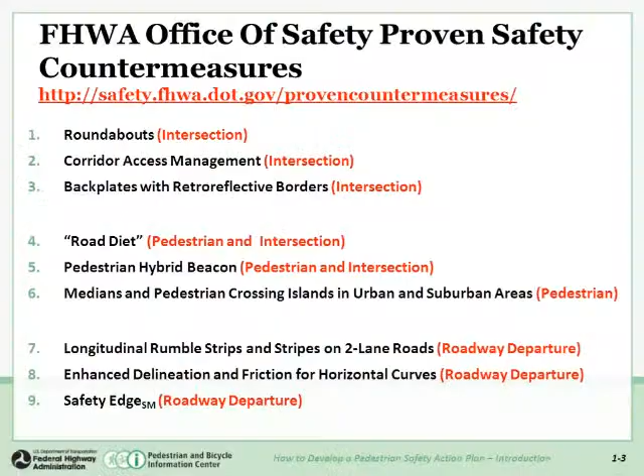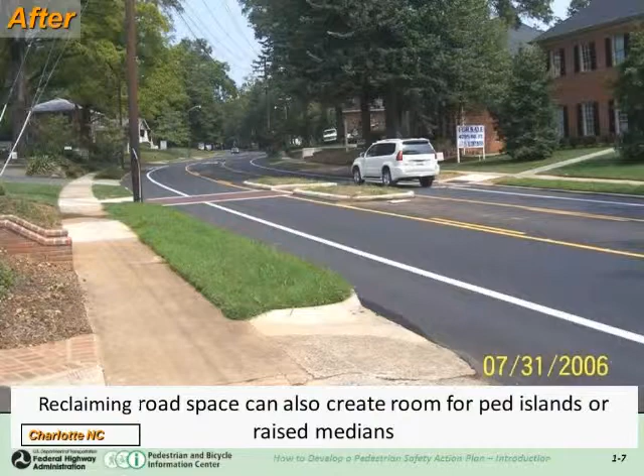Here's another type of road diet that could be implemented, which is instead of using just an ongoing two-way turn lane, you can reclaim the space for a median or median island for a refuge for pedestrians.

There have been a lot of before and after case study comparisons with raw crash frequencies, and some have measured speeds and other measures of effectiveness. There have been some operational modeling studies, primarily around the early 2000s. And recently we've seen some how-to guides and so forth come out. But the focus of my presentation is on the controlled safety evaluations of road diets.

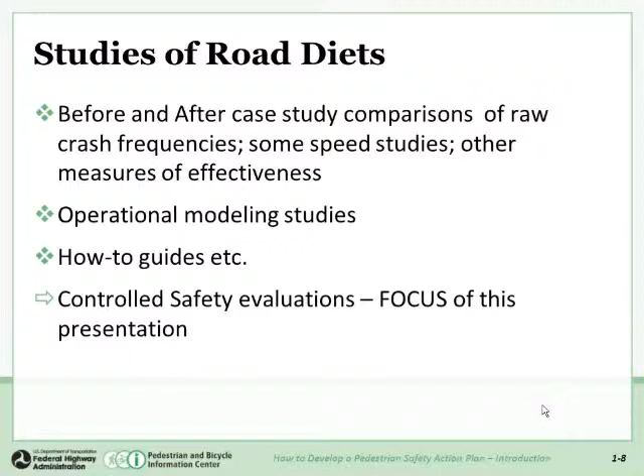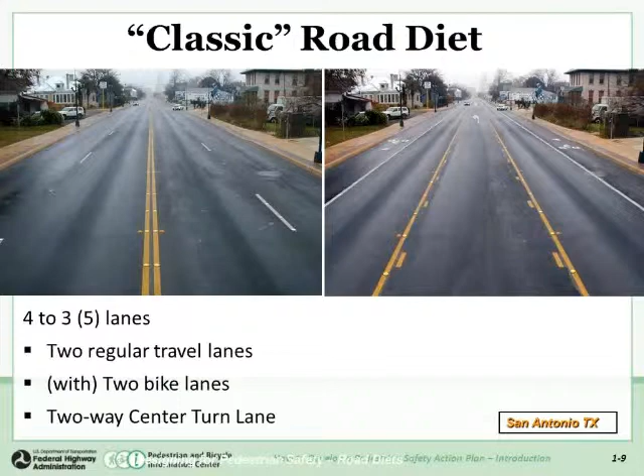So I have the easy part today. I haven't had to have the public meetings and all of those things to get road diets implemented. Once again, a majority of the sites that have been included in evaluations to this point have been the classic types of road diets, from 4 lane to 3 lanes, plus sometimes bike lanes or parking.

The Lyles study submitted to Michigan has been a bit controversial because it has generated a lot of discussion, because of some conclusions based on their both modeling and operations modeling and safety assessments. But I will just say that in their comparison group, it seems that their study sites were included in the comparison group, so any crash reductions associated with the treated sites could have been included in the comparison group, therefore potentially understating the differences there.

But there are no perfect studies really. There may be no volume data available for studies. There may be imperfectly matched comparison sites, or failure to examine area-wide effects, such as potential spillover, if there's traffic diversion and things like that.

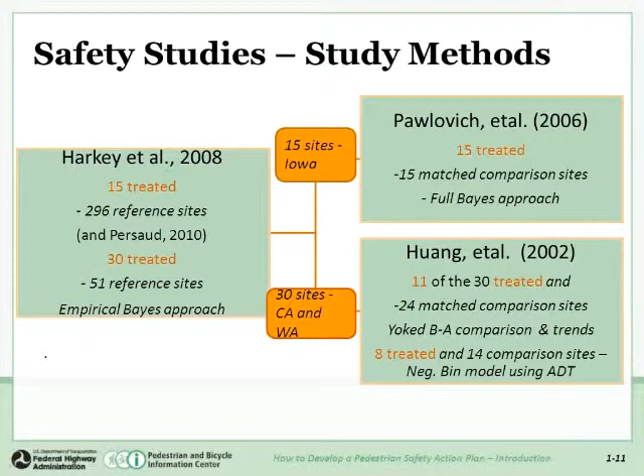So this is just a summary, directly out of the appendix for that report, of the Iowa data that were used for the treated sites. These are the data used by Pawlovich and later reanalyzed by Harkey. It shows the average number of before years of data and so on, and the after periods, and the average crashes per mile of roadway in the before and after periods.

And the traffic volumes, the AADTs before and after. You can see that the traffic volumes actually increased a little bit on average. This is average data for all of the sites, but there's no indication that traffic diversion was a big problem over this time period, at least judging by just the before and after AADT data. You can also see that just looking at observed crashes, the numbers seem to go down quite a bit.

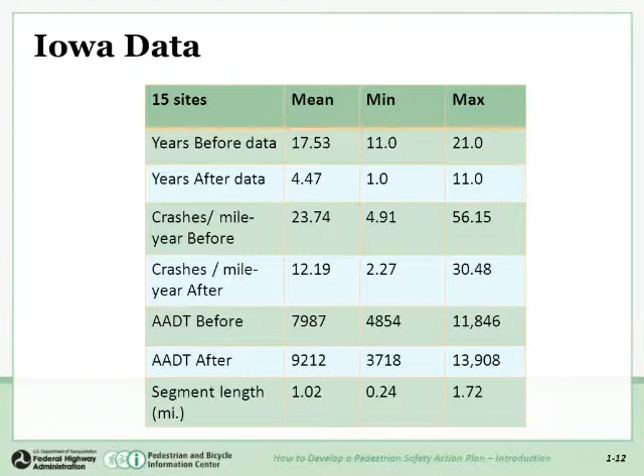So these are the data for California and Washington used by Huang, and then also again later in the NCHRP study. There's a little bit shorter period of data available for this group, but again the crashes per mile went down, not quite as much as in the other set, and the traffic volume data stayed about the same or went up slightly on average.

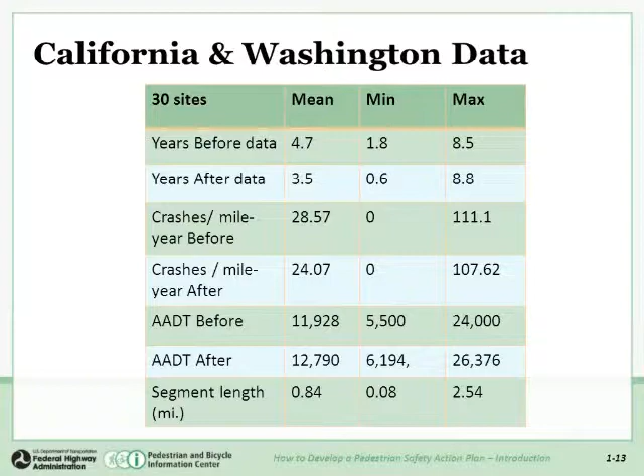So what they found - I'm going to report first on the most recent study, which analyzed with the larger reference groups. When they aggregated the data for all of the sites, Iowa, California, and Washington, there was a nearly 30% average crash reduction per site estimated. The standard errors were pretty low, about a little less than 2%.

They also performed disaggregate analyses for the sites in California and Washington versus the Iowa sites. You may recall from the earlier slide that the traffic volume ranges were a little different. Another thing that varied between the Washington/California sites and the Iowa sites is that the road diet or conversion sites in Washington and California were in larger urban areas than those in Iowa, which tended to be more like state highways going through smaller towns. So the estimates turned out to be fairly different when they disaggregated the two.

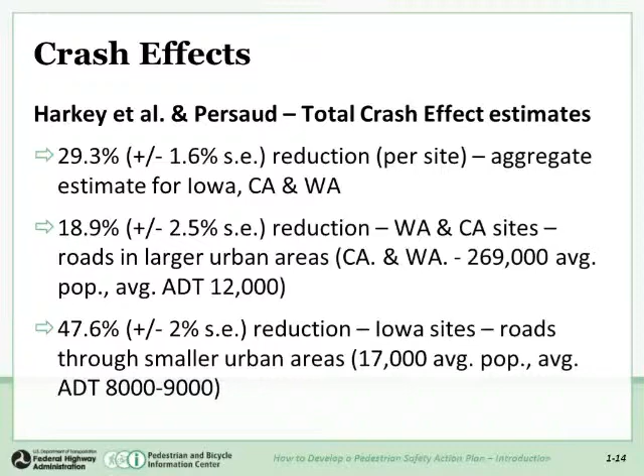The crash reductions obtained for the sites in Iowa were nearly 50%, about 48%, for those road diet segments, and less than 19% for the ones in California and Washington. So they recommended that if you are considering implementing road diets, you tailor your expectations accordingly - if you have sites more comparable to small towns, use the estimate for Iowa, and if you have sites in larger urban areas, use the estimates for Washington and California. If it's more general or a variety of site types, just use the aggregate estimate.

The earlier study using the Iowa data had interestingly come up with a somewhat different estimate, but these estimates aren't exactly measuring the same thing, so don't focus on that too much. Generally, the study of the Iowa data found a 25% reduction in crashes per mile. In the other study they weighted the segments by length rather than normalizing on a per-mile basis. As I mentioned before, they also used a slightly different analysis procedure - but that's what they found. Huang et al., in the earlier study, did not find much of an effect of road diets.

This is using the California and Washington data, but they had a much smaller comparison group, and so perhaps their estimates of expected crashes weren't quite as robust initially as the studies using the larger reference group. And they also didn't find a real difference in the trend between the road diet sites and the comparison sites. But if you remember, the effects were lower in California, and there may be some reasons for that, but at any rate.

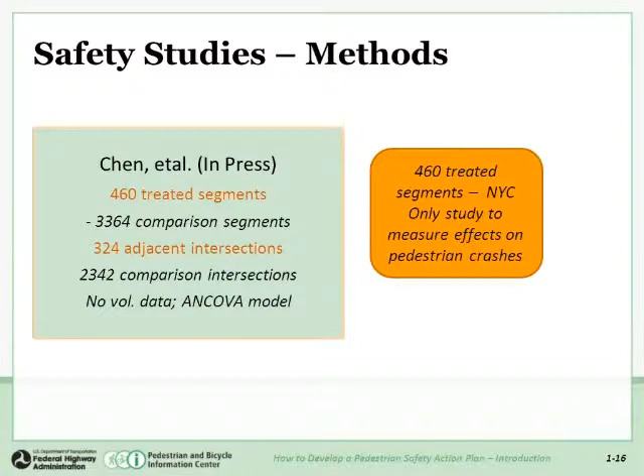They also decided that perhaps this treatment could have an effect on what happens at the intersections adjacent to the road diet, so they separately analyzed the effect on the adjacent intersections. So with that group, they were able to use 324 of the adjacent intersections. And again, they had a large comparison group for that. Unfortunately, they did not have traffic volume data, so they could not use the empirical Bayes type analysis. But based on the large number of sites, it seems to be a fairly robust study.

So this is a summary of the data they had. Again, the average crashes per site per year for the segments. You can see in the treated locations it went down from about 0.12 on average to 0.05.

I forgot I can be pointing to these. There we go.

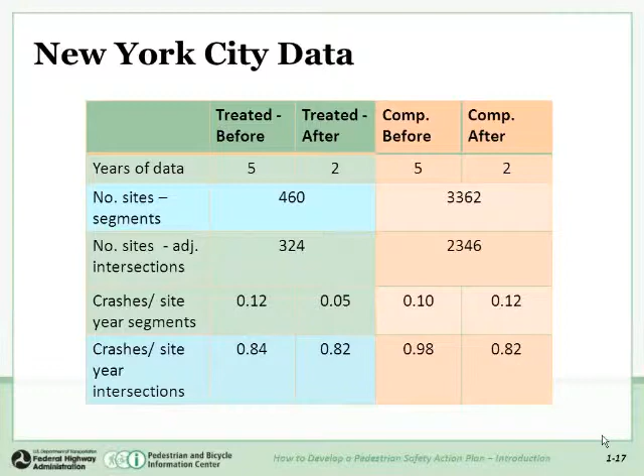So here we are, the crashes per segment. And then on the comparison group, the crashes actually increased slightly over that time period at segments. The crashes at intersections went down only slightly, and the comparison group for intersections actually went down somewhat more over the same time period.

So they did do a controlled comparison group trend type analysis in their ANCOVA model with the treatment intervention period dividing the before and after time. So they came up with an estimate of about 67% reduction in total crashes. The standard errors were a little higher than what we saw before, so about 7% there. And a reduction in fatal and injury crashes of 70% with a 9% error for the confidence intervals.

They did also find a reduction in pedestrian crashes, but this estimate was not significant. And you can see it has a pretty wide error value there, because generally pedestrian crashes are few in number, so it's really difficult to detect a significant effect on pedestrian crashes, as Charlie can vouch for. So the good things about all of these studies is they did use matched comparison groups, including this study as well.

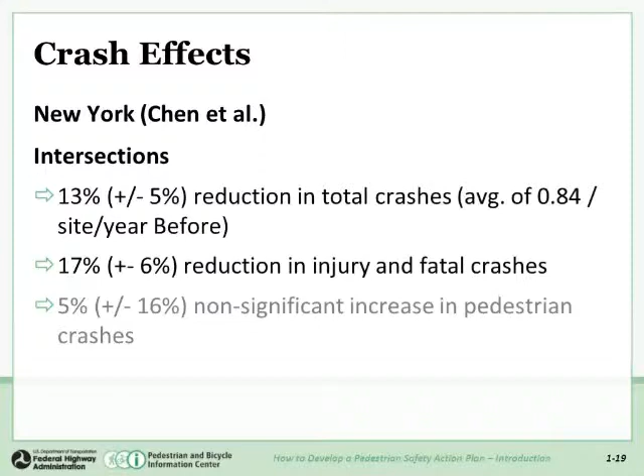So finally, picking up a couple of other studies that were not safety evaluations, or that I didn't talk about earlier, the Gates study, for example. These are some studies that had measured speeds, and so that helps us comprehend a little bit of the safety effects of road diets. So the work that Knapp and Giese did in Iowa, again, this is using some of those Iowa locations, and they looked at some case study data for those, and they did have speed data for a number of those locations.

So we did tend to see speed reductions on several of those sites, particularly reductions of the higher amounts of speeding. And the same with the Gates study from Minnesota. We saw decreases in mean and 85th percentile speeds. So that evidence helps support the safety effects that we found in other studies. I don't know how many of you are aware of this, but the Highway Safety Manual now has estimates for the safety effects of lower speeds. So that's something to check out if you're not aware of that.

So some of the other things that Knapp and Giese found is that through both simulation and measured speeds, in 63 out of 64 different combinations of access point densities, volume, and turning volume combinations, their models predicted lower speeds for 3-lane versus 4-lane cross sections.

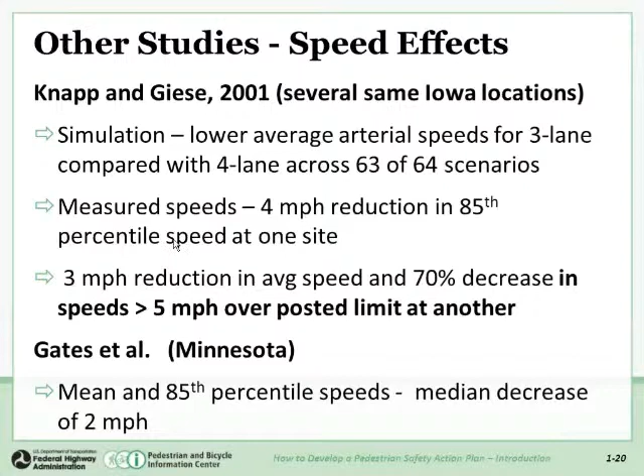Some of you know, so help me out. My brain is not working right now. Okay. Rosales. Somebody? Rosales. Yeah, that's right, Rosales.

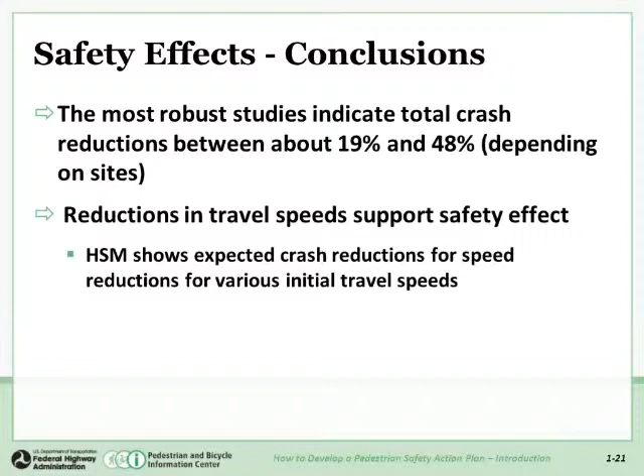Thank you. Okay. So finally, conclusions from the safety studies. The most robust studies indicate that the total crash reductions are between about 19% and 48%, depending on site characteristics. The reductions in travel speeds support the safety effects observed. And as I mentioned, the Highway Safety Manual shows expected crash reductions for speed reductions of various initial travel speeds. So this is in addition to reductions in conflicts and the other characteristics of road diets that contribute to crash reductions.

And Iowa was an example of that. Harkey et al. hypothesized that the Iowa sites had greater speed reductions after their road diets, based on some of that older data, than the California sites in the larger urban areas. So that may have contributed to the larger safety effects.

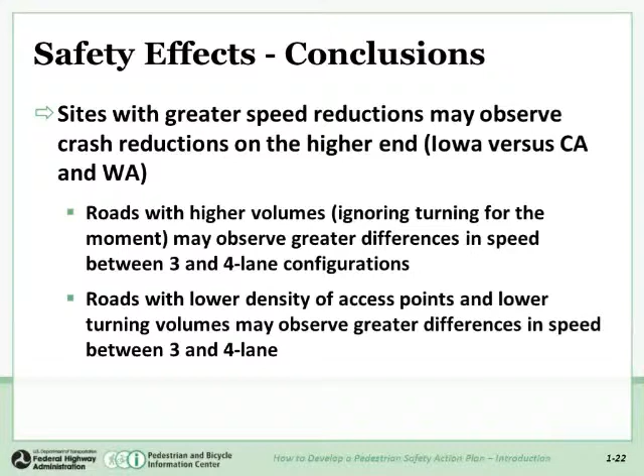And finally, as I was trying to describe just a minute ago, but may not have done a good job: the roads with a lower density of access points and lower turning volumes may observe greater differences in speed, but there may be trade-offs there because of the conflict situation. We also know that high turning volumes can make a 4-lane road operate more or less like a 3-lane. The roads with the higher volumes may have higher speed differences just because they're more constrained by the number of lanes.

So the higher severity crashes are also maybe significantly reduced, as found in the New York City study for segments and intersections. And the effects on pedestrians are more challenging to measure. Unfortunately, the study from New York City is the only one of these robust studies that has attempted to measure effects on pedestrians. But the trends are promising. It looks good for the mid-block crashes.

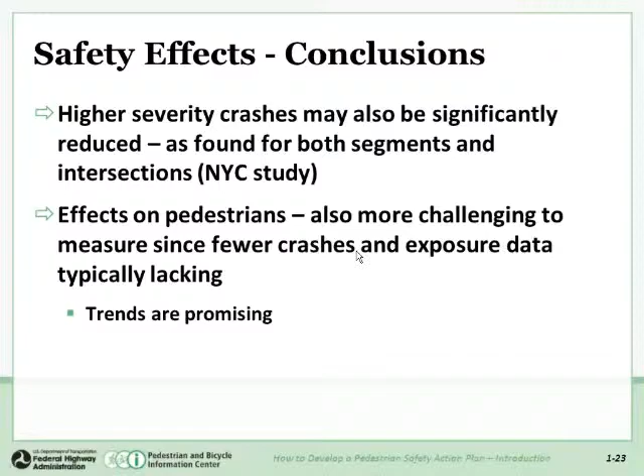Great, thank you so much, Libby. That's a great overview of some of the research and what the research shows. What we're going to do now is shift gears and hear from 2 examples of cities that are implementing road diets. So I'm going to turn it over to Mike Sallaberry. Mike is a transportation engineer with the San Francisco Municipal Transportation Agency, and he's going to be talking about some of their experience with road diets. So, Mike, go ahead and take control and begin whenever you're ready.

Thank you. Hello, everyone. My name is Mike Sallaberry. I work for San Francisco Municipal Transportation Agency. Been doing the job for about 13 years. I started out as an engineer with the bike program, went over to the traffic calming program and managed that for a little while. And now I am in the livable streets section, which works on bicycle, pedestrian, traffic calming, and streetscape projects. So that gives you some of my background. And in front of you, you see a picture of San Francisco with Market Street down the middle.

It's a more urbanized area. It's got 800,000 people per 47 square miles, so it's one of the more dense cities in the country. So for us, space is a premium, and road diets have become a really useful tool for us.

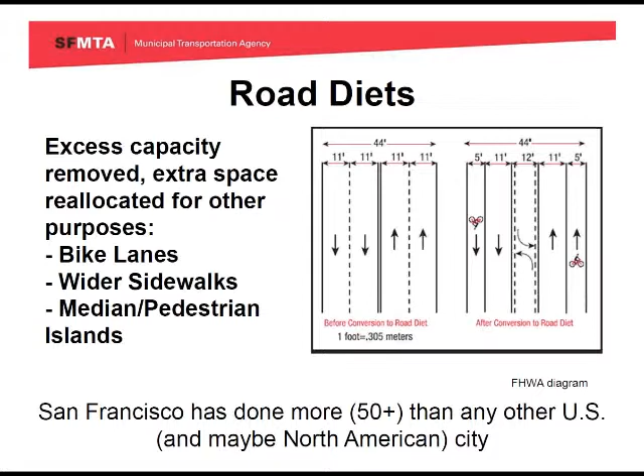And I think you all know a lot of this information. We've done over 50 road diets, and so far I haven't heard of another city that's done more. I mentioned this recently in New York, and no one refuted it. So if anybody knows of a city that's done more than 50, let me know, and I'll modify that statement a bit.

So as I mentioned, we're a very dense city, and when you have limited space, it could be treated as a limited resource. And when you have limited resources, it's key to use them efficiently. I think people have seen this photo or a version of this photo that shows the same number of people driving versus taking the bus versus walking or cycling, and you can see the effect on our limited space.

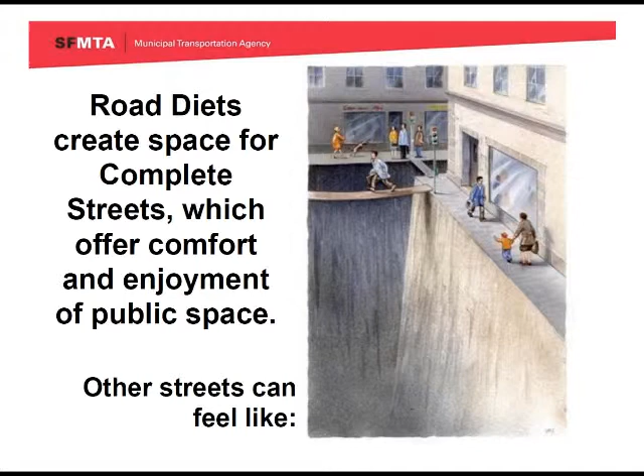One of the great things about road diets is that it creates space for complete streets. And we know that complete streets are more comfortable for everyone, but especially for vulnerable road users like pedestrians and cyclists. So when we don't have that space, I think we've all felt in our own cities or other cities how precarious it can be when you have narrow sidewalks and difficult crossings of major streets.

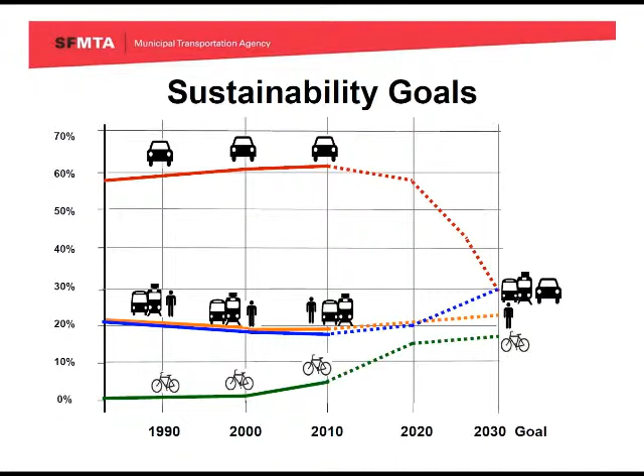So San Francisco has some ambitious goals. Basically, we want to reduce the use of personal motor vehicles and increase transit, bicycle, and pedestrian trips. This shows all trips in a typical day. Our work trips are pretty good. We're already at more or less 50% bike, pedestrian, and transit use for work trips. But we want to constantly improve that.

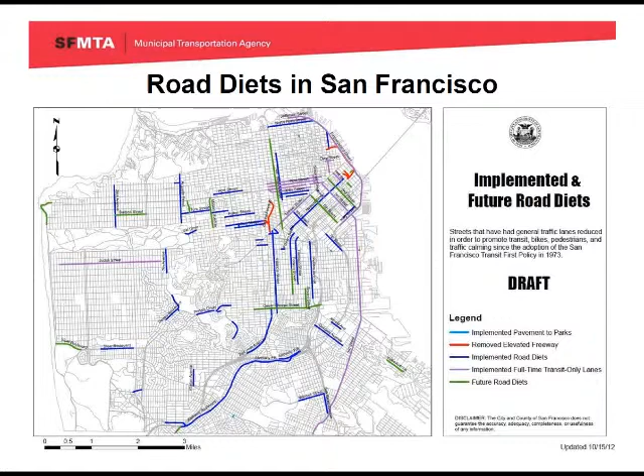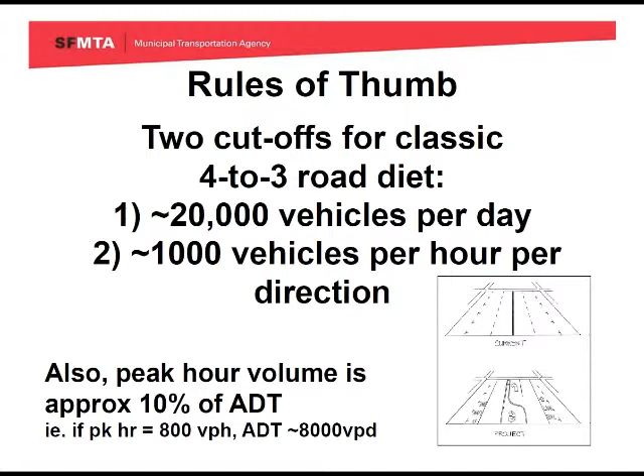So I'm going to focus more on how to implement road diets. I think most people know the benefits, the safety benefits, what we can do with the increased space, but how do we get them in? First of all, a good rule of thumb is 20,000 vehicles per day. If a street has 20,000 or less, then it's a candidate for a road diet. It also translates to about 1,000 vehicles per hour per direction, and that would qualify a road for a 4-to-3 road diet. The closer you are to 20,000 vehicles per day, the more you have to look at the signal timing and the potential for spillover, but it is a good rule of thumb.

One of our key road diets was Valencia Street, done in 1999. The 20,000 vehicles per day rule of thumb actually applied here. This street used to have 23,000 vehicles per day, and after the road diet, it went down to 20,000. And the reason the slight spillover worked here is because there are parallel arterials to this roadway. So when you are at that 20,000 vehicle per day threshold, keep in mind: if there is spillover, where would it go? If you're talking about neighborhood, local streets, that's going to be more of a problem than if you have an arterial nearby.

This road diet was done in 1999, and it was controversial. There was a strong demand by bicyclists for this street, but there were also some concerns because we had not done a lot of road diets, and the merchants were concerned about what it would do for business. So one tool to get around resistance to road diets, or any project really, is to install it as a trial. In this case, we promised a report 6 months and 1 year after the fact, to present the findings and let our city council decide whether or not to keep it. I think that's a very useful tool.

I would warn that if you are going to do a trial, one, set aside the resources for a before and after study, and two, anytime you try something new, try it on a street where you're pretty confident it's going to succeed. Because if you try something high profile as a trial and it completely fails, it's going to set you back for a while. Luckily, in this case, Valencia Street turned out to be a great success.

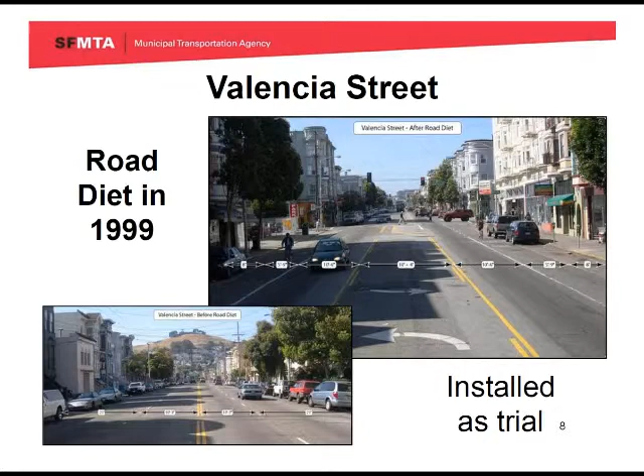There were a lot more cyclists, crashes went down, and the merchants were really in favor of keeping the trial, making it permanent. And in fact, 10 or 15 years later or so, we go to Valencia Street 2.0, where we retained the road diet, and we actually widened sidewalks, added bulb outs, widened the bike lanes, added street trees, a whole variety of different measures to really improve the street even further.

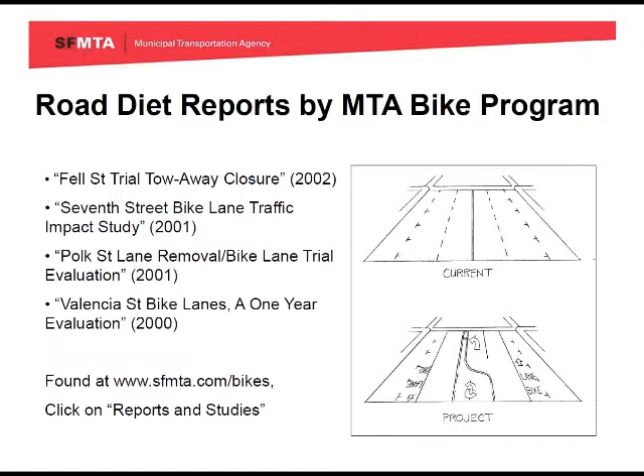I'm going to move fairly quickly through some of these slides, but later on if you want to look at some of the reports that we've written about these trials, there's a whole era of trials. Early on with the road diets, we did 4 trials within a 2-year period. You can see 4 here, and if you go to our website, sfmta.com/bikes, click on reports and studies, you can see some of the before and after studies we've done. As the years have progressed, we got better and better at doing these studies, so you can see some of the information collected and apply that to your own city as appropriate.

People sometimes are skeptical and say, oh, you say it's a trial, but it's going to be in permanently. Well, there was at least one trial that did not go as planned. I think you learn the most from your mistakes, but if possible, it's always better to learn from other people's mistakes. So in our case, we made the mistake: we misjudged the amount of spillover, and traffic spilled over into neighborhood streets.

A lot of the residents understood why we did the project. We had very narrow lanes. People were parking on the sidewalks. It was just kind of a messy situation out there. But they didn't see the benefits, and the spillover negated what little benefits we had. So eventually, we actually restored the street back to 4 lanes. So I think it's very important to understand the context of the project and see what is the true demand for a trial or a road diet.

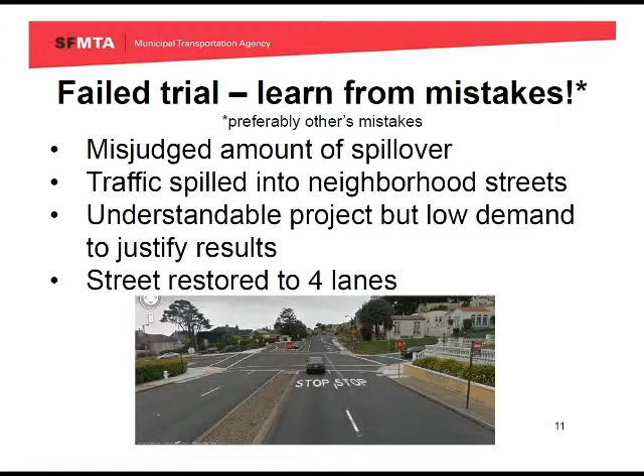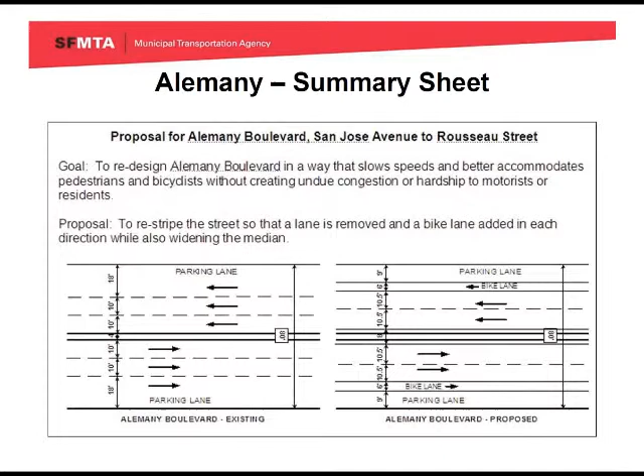Alemany is one street where we performed a road diet. It's a 6-lane street. You can see in the bottom left, 6 lanes with parking and a 4-foot wide median. What these slides show is snippets from our outreach, including some of the arguments that we used to help convince a very skeptical neighborhood about this road diet. In the end, it turned out to work well. The street was way over capacity.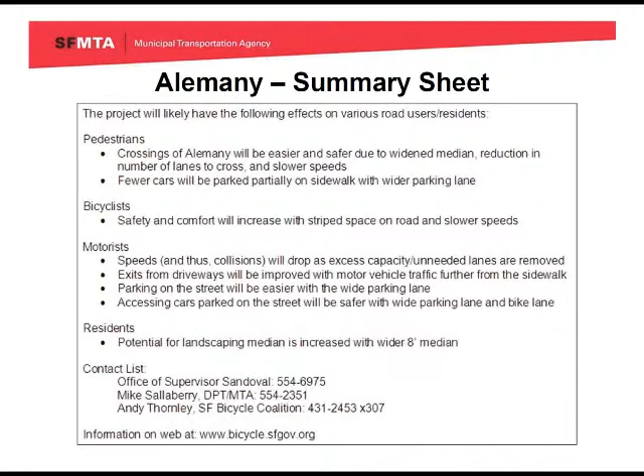You can see how we try to sell the project: the benefits for pedestrians, the benefits for bicyclists, and a lot of benefits for motorists. High speeds are dangerous for everybody, but we also try to sell to the neighborhood by saying your exits from driveways will be easier because traffic is pushed away from the driveways and from the parking lanes. Getting to your parking spot will be easier, and you have more space to park your car. So this was just trying to show everyone the multiple benefits associated with a road diet.

I'll touch on a couple other projects really quickly. This is just another example of how a road diet significantly lowered speeds and especially collisions. In this particular case, collisions went down 84%. So again, just more evidence of how these are very useful projects.

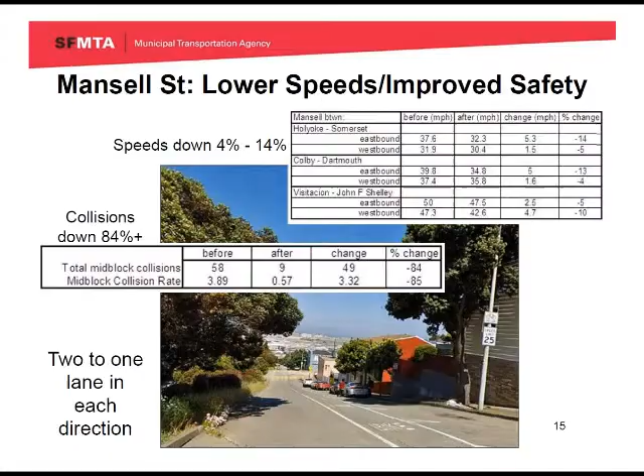Another argument to use sometimes if you have a skeptical populace or a merchants group is that more and more I'm seeing studies that show that pedestrians and people who use bicycles actually spend more over a month or so than people who drive. The drivers may spend more at each visit, but they may not visit as often. So this was one report that was done for Columbus Avenue in San Francisco, and it could provide compelling evidence for how this could be beneficial for business.

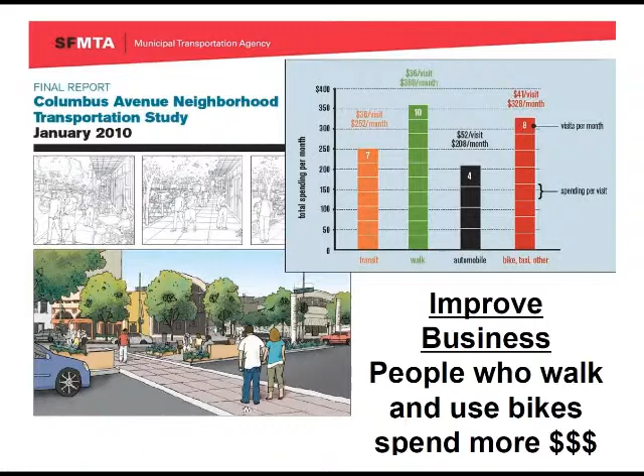You see some people parking on the sidewalk because they're afraid to get sideswiped. You even have freeway scale signage on the street. It's just not a very pleasant street to walk along, bike along, or cross. So we're focusing on improving safety there. And these are just some old pictures.

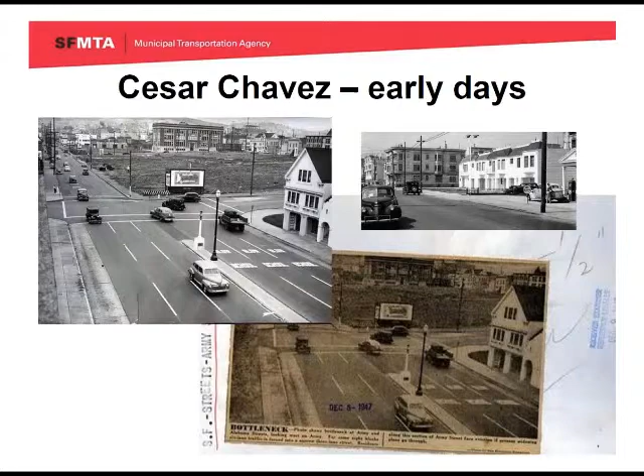It actually used to be a 2-lane roadway. You look at the picture on the top left, that's a two-lane roadway with parking, and then the bottom toward the right of that picture is how the street was being widened. So a lot of people may have issues with change, but change is constant, and sometimes the change you're promoting is actually to bring it back closer to what it used to be. So it's a really interesting project, and it's under construction now.

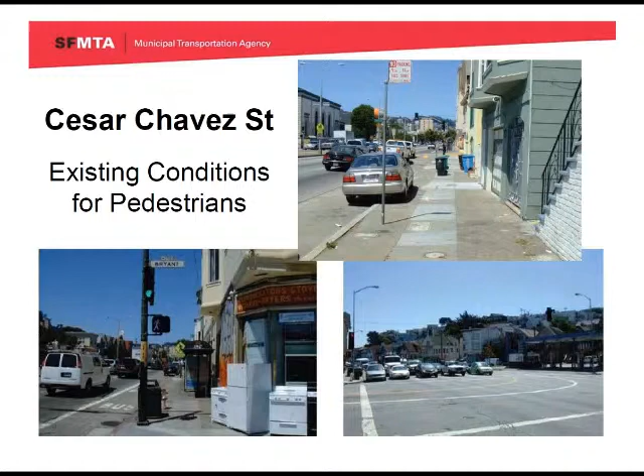And part of it was that it's just kind of miserable to walk along, especially. And you can see these are 3 classic scenarios that you run across: people parking on the sidewalk, which is fairly narrow. You know, one transit shelter will block it. And you can see on the bottom right, that's one of the pedestrian crossings. And it's kind of daunting when you have 4 lanes of traffic in this particular intersection approach, or 3 lanes, and just a lot of asphalt to cover. And so there's a strong desire by the neighborhood to do something about it.

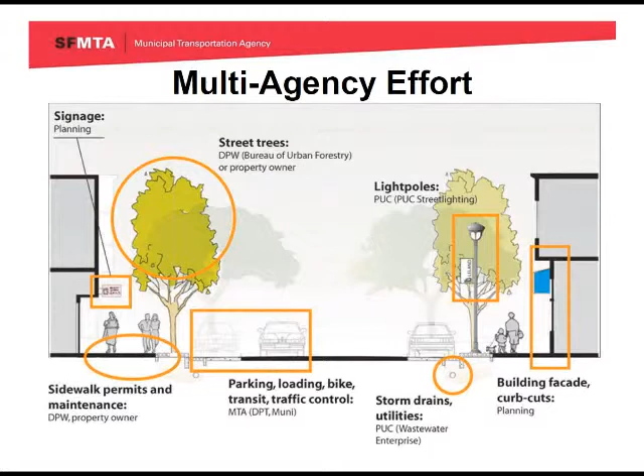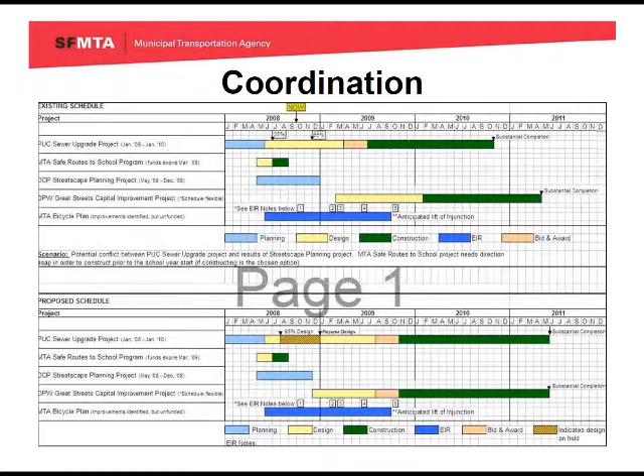This turned out to be a multi-agency effort. So as the street was being torn up for sewer projects, rather than rebuild it the way it was, it turned out to be a great opportunity to try to add many different amenities. And so ultimately there were four agencies involved, and it's just a lot of coordination. These dates are a little bit out of date because of schedule changes, but it kind of shows the various projects and departments that were involved in trying to make this happen over a 4-year period.

So lots of design considerations. Obviously pedestrians, bicyclists, you have to think about truck turning templates, the signal design, accessibility. There's schools and parks on each side of the street. We also have transit along the street. This street leads to a freeway, so you have local and regional traffic. And just building the streetscape project is challenging because you have to close off lanes to build the bulb outs and the medians, and how do you deal with the traffic routing during that?

And what we had to do was collect a lot of traffic volume data around the neighborhood on streets where we suspected there would be spillover traffic. So it's always good to have in case people say, oh, there's more spillover or higher speeds. You can say objectively if that's true or not.

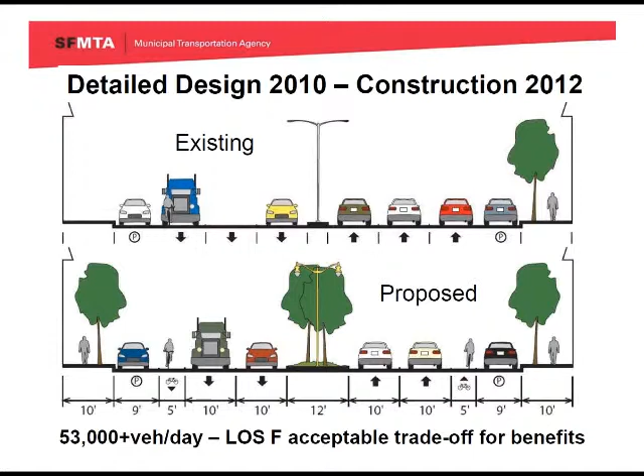So I think this is an interesting project because we as a city have decided that, yes, it's going to be level of service F, but this is worthwhile. And part of the argument is that it's only 1 or 2 hours a day, and through a vast majority of time, there's tons of unused capacity.

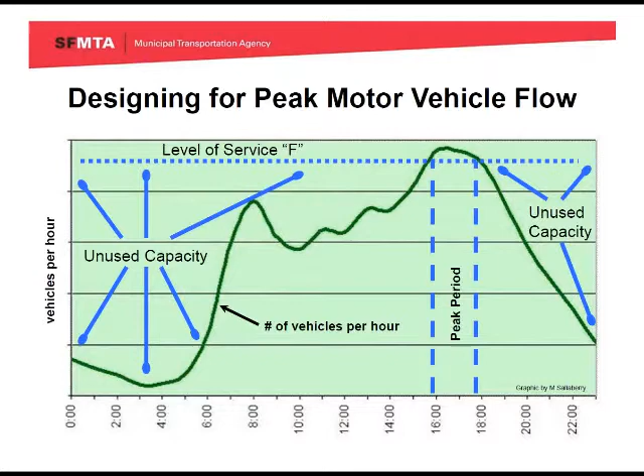So the need for safety improvements, for more pedestrian, bicycle, and transit measures made it a compelling reason. I think this graph is very typical of a street with two peaks, one being larger than another. So this argument could be used for streets in your city.

When you design for a peak hour, if you want to get level of service B or C at all times of day including the peak hour, what you end up with most of the time is a lot of empty lanes, and that encourages speeding. Frankly, it's a really inefficient use of valuable space, especially in many of our cities and towns. You can see, if you're on this road, it's going to be very difficult to stay at the 25-mile-per-hour speed limit.

As a pedestrian, look at all these lanes and this asphalt that you have to cross, especially if you are a person with disabilities, a child, or a senior. This is a daunting street to cross.

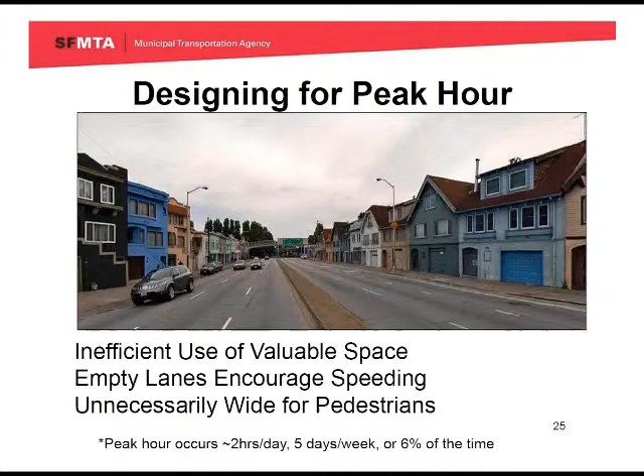At the bottom, you can see the asterisk says a peak hour occurs only more or less two hours a day, five days a week, and that's 6% of the time. So people often say about road diets that this project is going to create congestion. If you're near that 20,000-vehicle-per-day threshold for a 4-to-3 road diet, that may be the case. But one argument is that you may have congestion 6% of the time, but the safety benefits will be there 24/7. I think that becomes compelling.

If you're new to road diets, do a few successful, easy examples, and create a pattern of showing people that these work. For Valencia Street, which is shown here, it really opened the floodgates for us, people saw how great it was. It got a lot of press, and we've been going gangbusters since then.

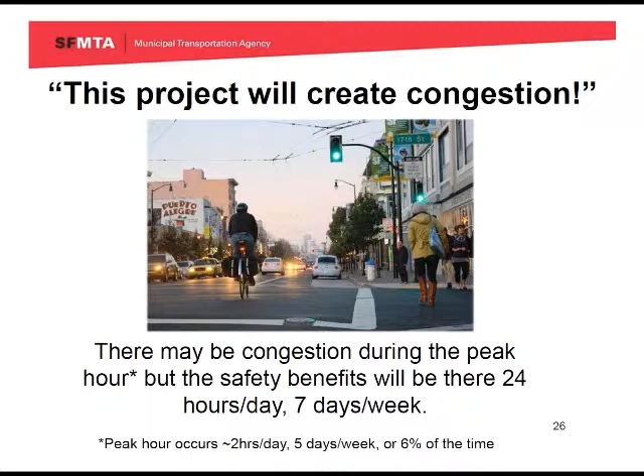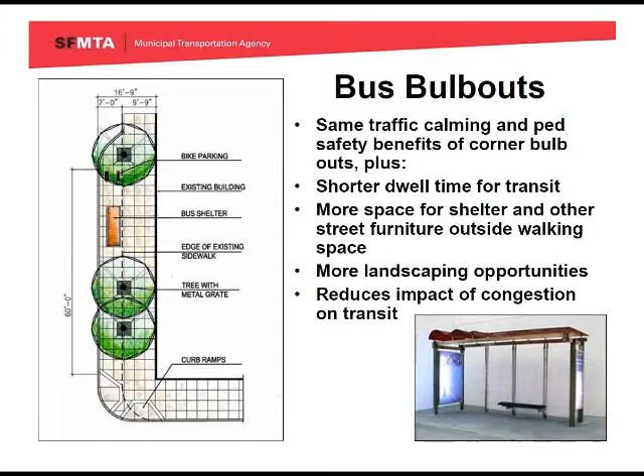One consideration, if you have transit on the street and there's going to be some congestion, is that you can use what are called bus bulb-outs. That allows the bus to not have to exit the travel lane, but stay in the lane, stop all the traffic behind it, and when they pick up their passengers, continue straight without having to pull back into the traffic stream. These have multiple benefits: they widen the sidewalk at the corner, they shorten the crossing distance, and they help transit by reducing the effect of congestion on transit.

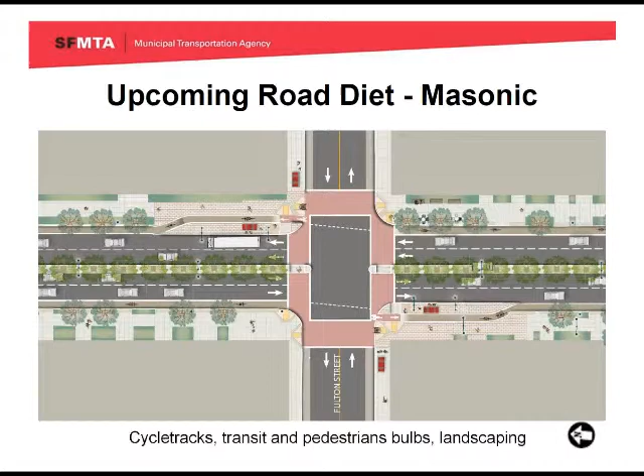One project that I think will be very exciting is Masonic, a $20 million project that has been conceptually designed. We're looking for funding. This road diet is going to go from basically 6 lanes to 4 lanes and provide raised cycle tracks. We want to get a higher standard of bicycle accommodation, but also improve safety for pedestrians and improve operations for transit. I think it's going to be an exciting project, and in the next year or two we'll hear more about how this is progressing.

We often talk about road diets taking space away from motor vehicle travel lanes, but I'll throw out there that you can also convert parking spaces, or that parking lane could be used more efficiently. In this case, San Francisco has done a lot of parklets, and if you have a lot of unemployed architects out there coming out of college, they love these things.

We're doing tons of parklets. What they are, basically, is you take out a couple of parking spaces and replace it with a 6-foot-wide deck. It's really, really impressive how creative people are with that space, and it's been used so heavily.

I think this is something you see also in New York, where they've converted some of their excess pavement to parks. There's just a strong demand for outdoor seating, for more greenery. Bike parking, you can put it on these parklets instead of on the sidewalk, and this has been a huge success.

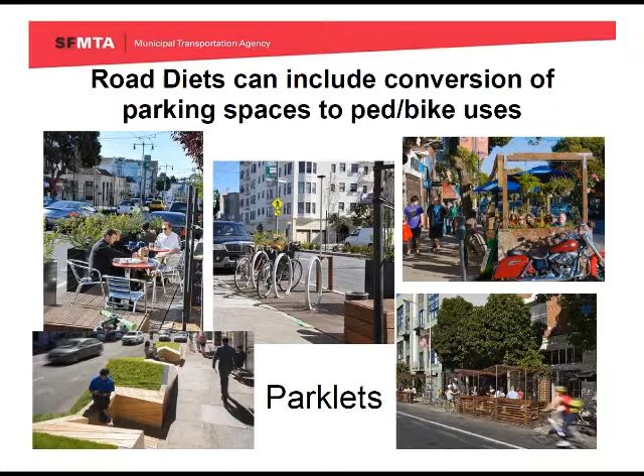We've also been creating on-street bicycle parking, another example of using limited space more efficiently. Generally, one car space is enough room for 10 to 12 bicycles. Not only are you providing more efficient use of that space, you're also clearing the sidewalk for pedestrians.

That's very important, especially in the top middle photo at our main library. That was the impetus for this project back, I think, 6, 7, 8 years ago, where we removed a lot of the bike parking that was on the sidewalk and really narrowed the sidewalk.

These are great programs, and they're all requested by fronting business owners. Just the fact that we've been getting so many requests for these bike corrals, for these parklets, shows that they're working, that people want them. They're willing to trade away the parking spot in front of their business for these sorts of amenities.

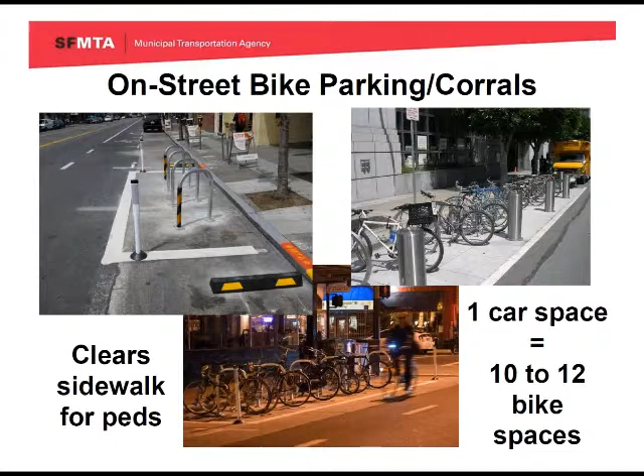It's one of our great examples of a complete street because it has wide sidewalks, room for bicyclists, transit in the median, and lots of parks and public spaces. It's just a much better environment. It connects the waterfront with the urban core. It's been a great success.

A lot of these projects are great for the street itself and great for business, but they're also in tune with our goals for affecting a shift in how people get around the city. We're not saying one way of getting around is the only way - we want to give people choices on how they travel. You shouldn't have to be brave to walk to a destination or use a bicycle.

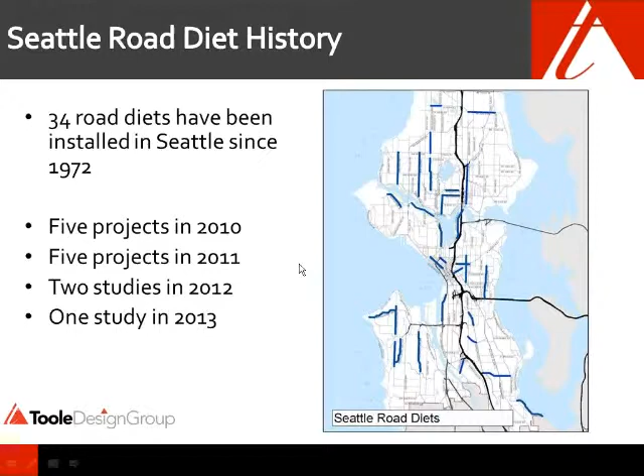We have dedicated funding, as I mentioned, and each project goes through a complete streets checklist, which each project manager and team will go through as they design a project. We also have a significant outreach component to each project, and most of this is happening through redesigning streets.

The traffic volumes have actually increased on the street - it was originally 19,000 and went up. It's now at 22,000, and it's still functioning beautifully as a complete street.

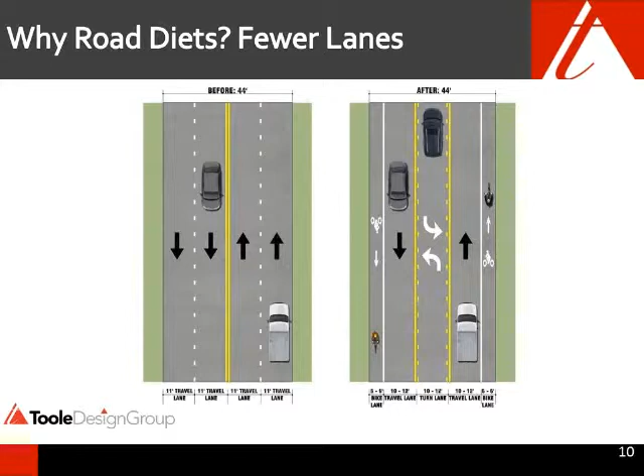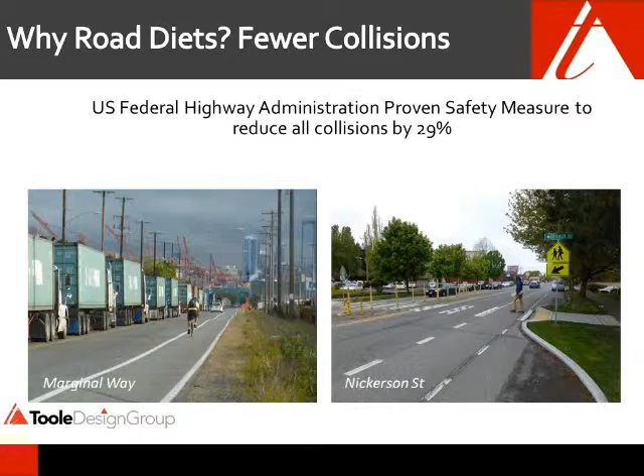This is also covered, but fewer collisions. Road diets are a proven safety measure, reducing collisions by 29%. The 2 examples here are roadways: one, Marginal Way, along the Port of Seattle, which is mostly a freight and bicycle route, and the other is Nickerson Street, where we were able to install median crossing islands and improve areas where there had been several pedestrian fatalities.

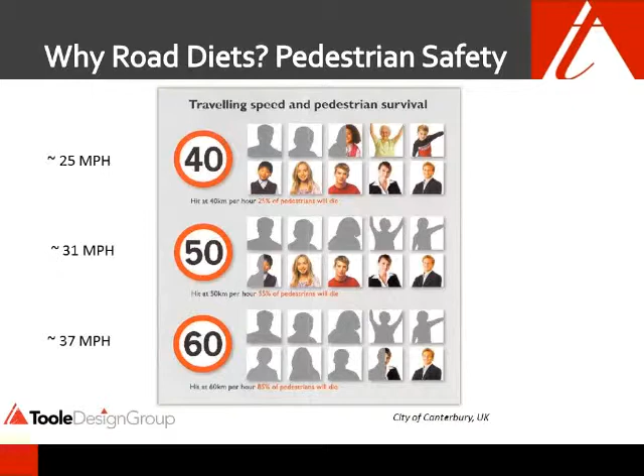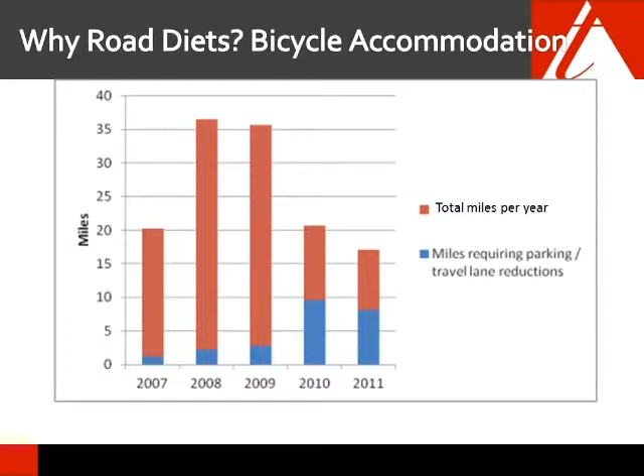The next couple slides, I'll talk about some projects where we implemented road diets and then went back, studied the roadway, and made additional changes—like Mike mentioned, a 2.0 approach to road diets. We've been able to do that through our Complete Streets approach.

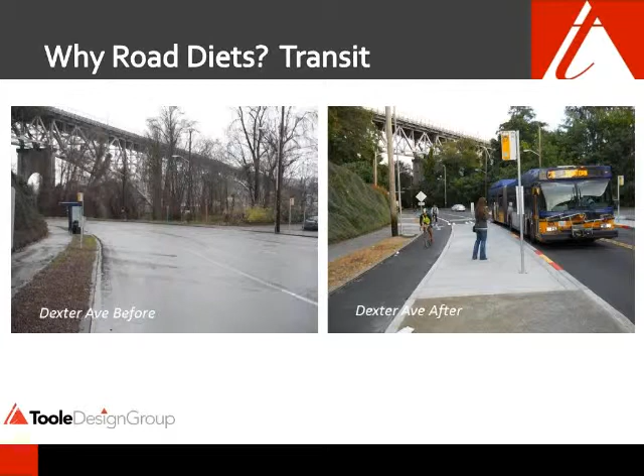So some of the pitfalls are you don't do a before and after study. As Mike mentioned, it's really important to have data to support primarily your research or your outreach, but it helps to have some indication both before and after the project. Another issue or pitfall is that the signal timing is not right. If there are a lot of signals along a corridor, it's really important to go ahead and do the study and spend the money to optimize the signals.

And another issue is the public outreach. It's not done. Road diets are really counterintuitive, and you really need to get buy-in from neighbors and businesses. There's really something kind of illogical in saying that we're taking a lane while improving capacity. So making sure that the public understands what you're doing is really critical. And as Mike mentioned also, it's important to do a project that's going to be a success. Don't do your hardest project first.

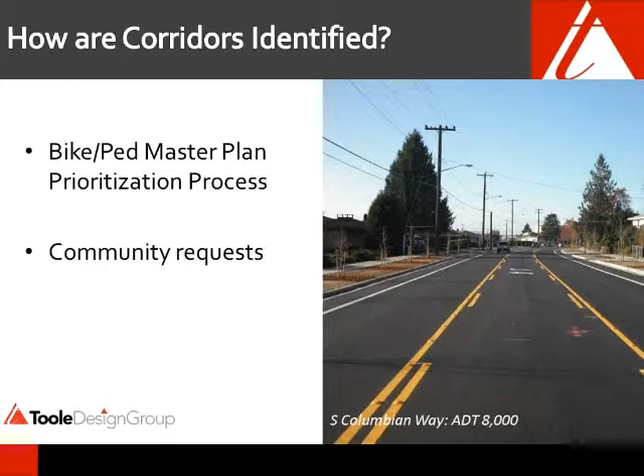And then a lot of our projects are implemented through capital improvement projects. We do a lot in coordination with repaving projects. They're often funded by Bike and Ped funding. And then we're also working very, very closely with King County Metro, our transit agency.

So just to go quickly through some of the factors that we consider when we look at a roadway, we kind of have 3 tiers. The first is traffic operations. We look at the traffic volume. If it's under 15,000 vehicles, we'll usually move forward with a road diet. If it's 15,000 to 20,000, it will require an evaluation. And if it's over 20,000, it's a maybe and will really require a lot more evaluation.

Other factors include peak period, as Mike mentioned, upwards of 1,000 vehicles per hour per day. We look at right and left turning movements, pedestrian and bicycle volumes, and signals. Also, driveways and turning movements are critical factors to look at as well.

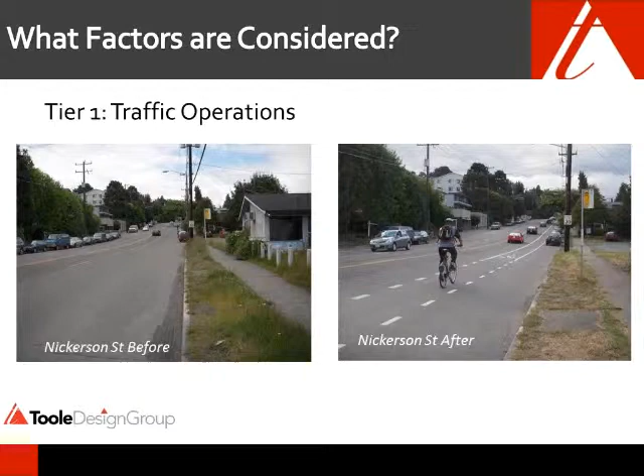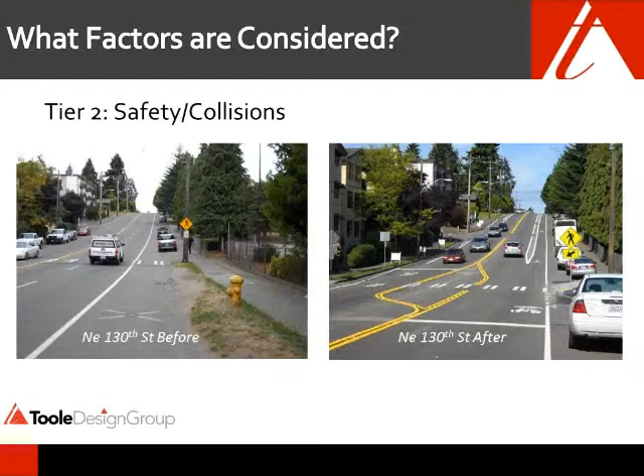The second tier is safety. We look at whether the corridor has a high number of vehicular, pedestrian, or bike crashes and how that compares to other arterials of similar volumes. And we also look at the speeds of vehicles, whether or not they're higher than the posted speed limit. And then livability, I should say livability and walkability.

We tend to choose streets that are in commercial districts, areas where you want lower speeds, have higher multimodal use, where you want less noise, and are more aesthetically pleasing. So streets that are either historic streets or main streets, those sorts of places are good candidates for road diets.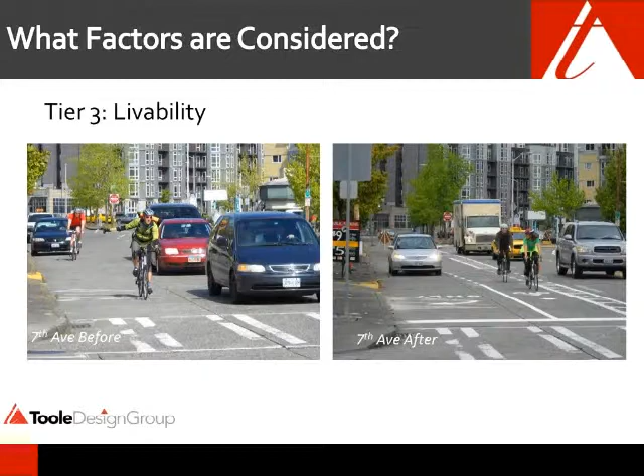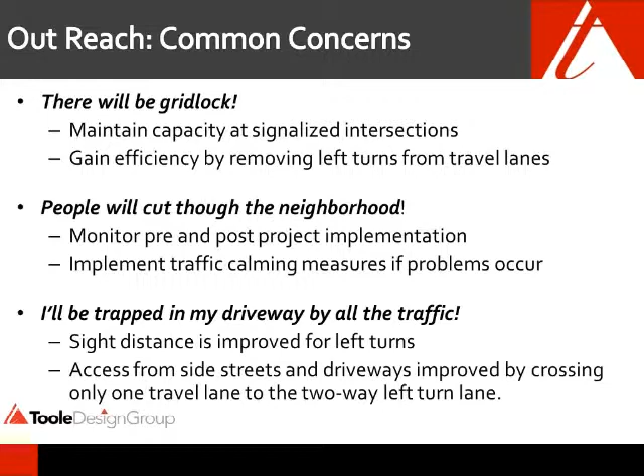So you can really use data to counter some of the common concerns you'll hear from the public. There will be gridlock. You want to be able to show that you can maintain capacity at signalized intersections. Another common concern is people will cut through the neighborhood. You definitely want to monitor pre- and post-project implementation. Often we'll look at adjacent streets and monitor those volumes and install traffic calming if necessary. And then explain how road diets work, that sight distance is improved so that people won't actually be stuck in their driveways.

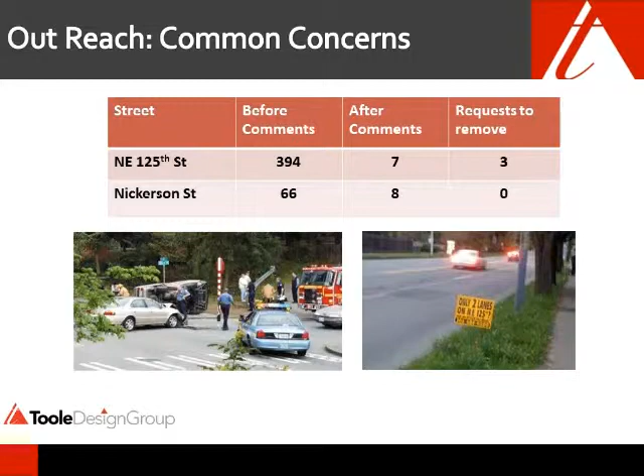The top project was a rechannelization in a business district, and there was a neighborhood group that kind of rallied against it, and you can see in the lower right they made yard signs against the project. Another community group kind of retaliated and started sending collision images to various blogs. So there were definitely two camps, but you can see there were only 3 requests to remove the road diet at the end. People liked it.

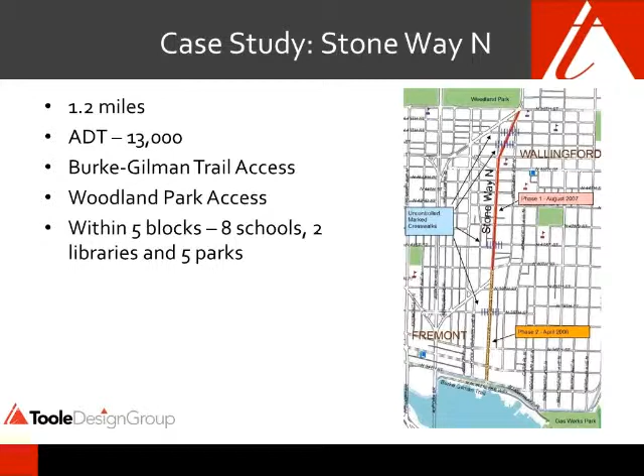So I'll just go through really quickly a couple of case studies just to illustrate how we go about our studies and what some of the outcomes are. This is Stone Way, which was the first project that we implemented for the bicycle master plan, although it had a lot of pedestrian improvements as well. It's a roadway that connects a major regional trail to a regional park, and as you can see has a lot of schools and connects kind of a barrier between a neighborhood.

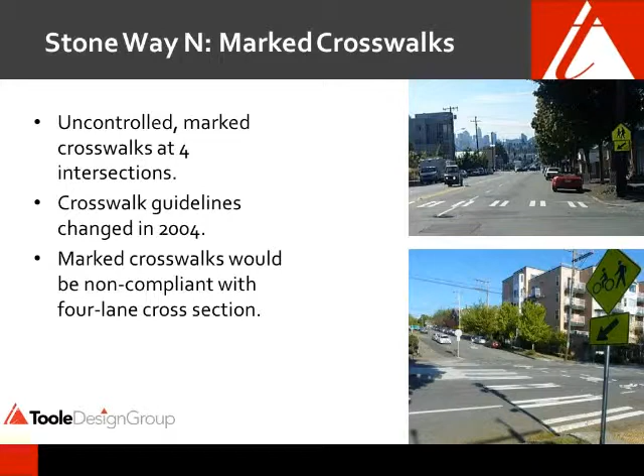The roadway also had several uncontrolled marked crosswalks, and those were going to have to be removed based on new guidelines. And so in order to maintain the marked crosswalks, a road diet was of interest. Bicycle Master Plan recommended a climbing lane and shared lane markings on the roadway. The posted speed limit was 30 miles an hour.

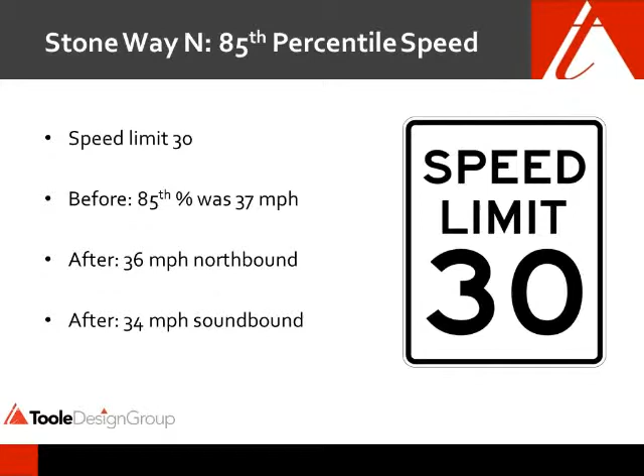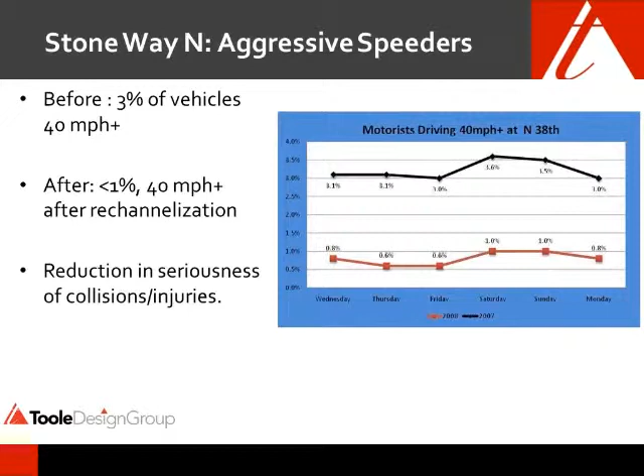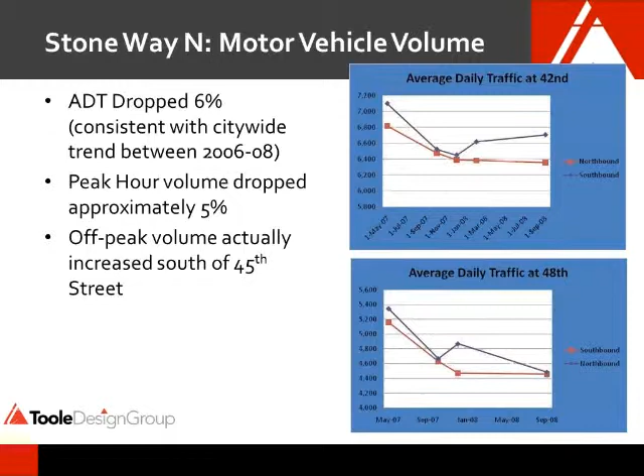And what was really exciting about this project was the increase in bicycles. At peak hour, 15% of the peak hour traffic volume was bicycles, so quite a latent demand there. We also saw that ADTs dropped, and that was consistent with the citywide ADT numbers, and we also saw a decrease in peak hour traffic volumes. What was interesting is we didn't see an increase in 4 adjacent roadways that would be used as cut-throughs. So overall volumes decreased, and there was not any diversion after the project.